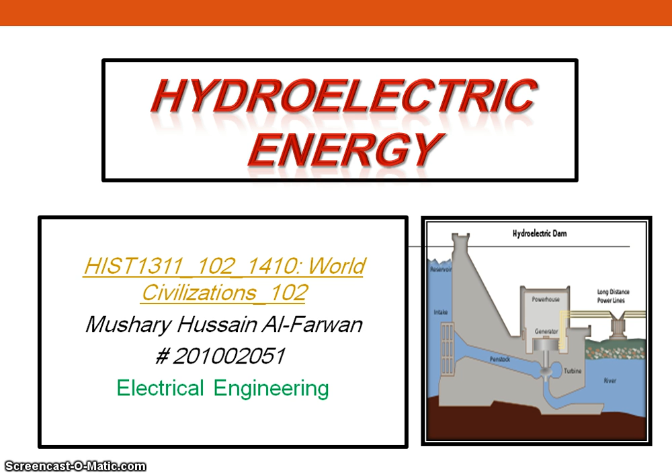Today I will talk about hydroelectric power, or hydroelectric energy. This kind of energy is very important in our future because it has many benefits, more than other kinds of energy.

My outline: I will talk about what hydroelectricity is, the history of hydroelectricity, methods to generate hydroelectricity, and I will give you some advantages of hydroelectricity. In the end, we will talk about world hydroelectric capacity.

What is hydroelectricity? Hydroelectricity is the term referring to electricity generated by hydropower, the production of electrical power through the use of the gravitational force of falling or flowing water, from up to down in this way. Hydroelectricity is the most widely used form of renewable energy.

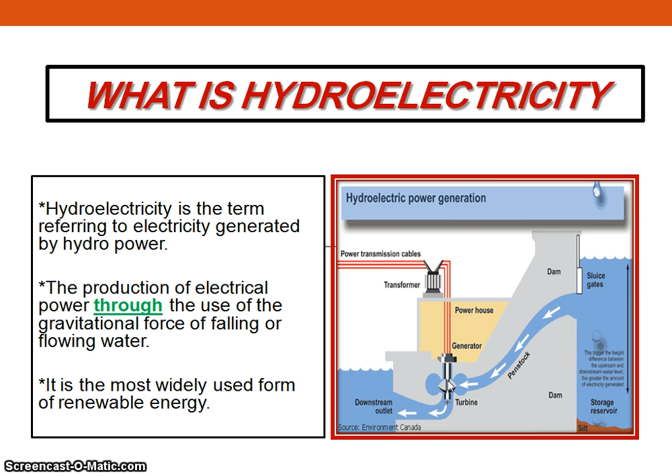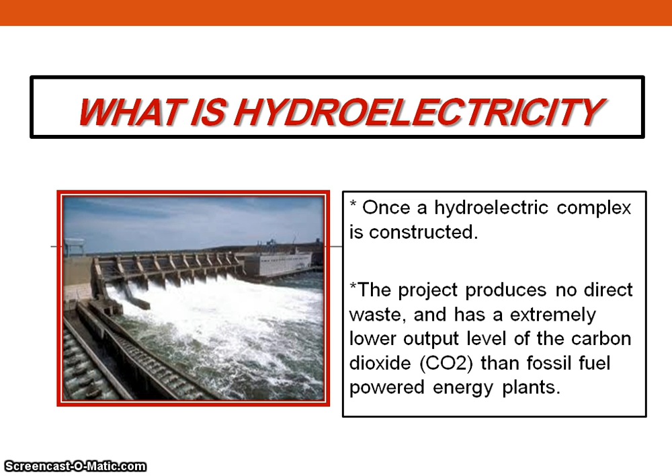Once a hydroelectric complex is constructed, the project produces no direct waste and has an extremely lower output level of carbon dioxide, CO2, than fossil fuel powered energy plants.

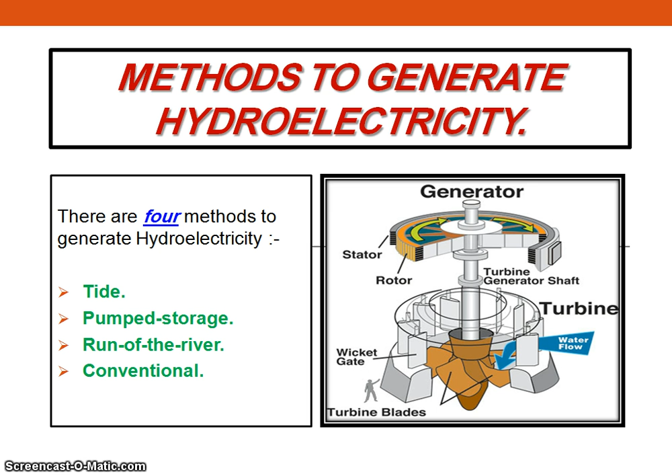Now we will talk about the methods to generate hydroelectricity. There are 4 methods to generate hydroelectricity. The first method is called the tide method. Second one, pumped storage method. Third one, run of the river method. The last one, conventional method. I will explain each of them in the next slide.

The tidal method: a tidal power plant makes use of the daily rise and fall of water due to tides. It can also be dispatched to generate power during high demand periods. Less common types of hydro schemes use water's kinetic energy or undammed sources such as undershot water wheels.

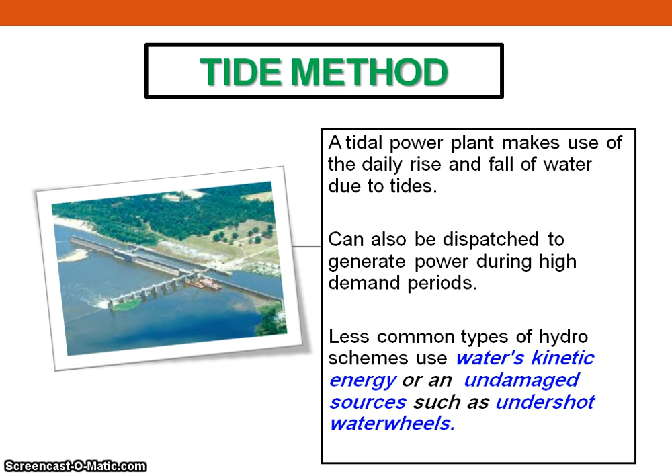Pumped storage method and run of the river method. These methods produce electricity to supply high peak demand by moving water between reservoirs or between tanks, which are here in this picture, this one and this, at different elevations at times of low electrical demand.

Pumped storage schemes currently provide the most commercially important means of large-scale grid energy storage and improve the daily capacity factor of the generation system.

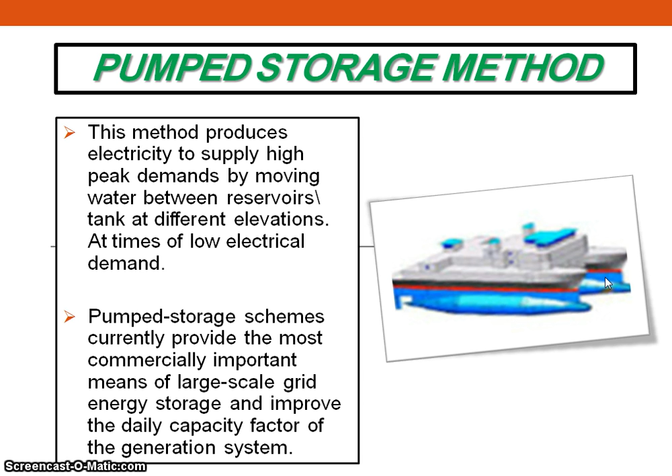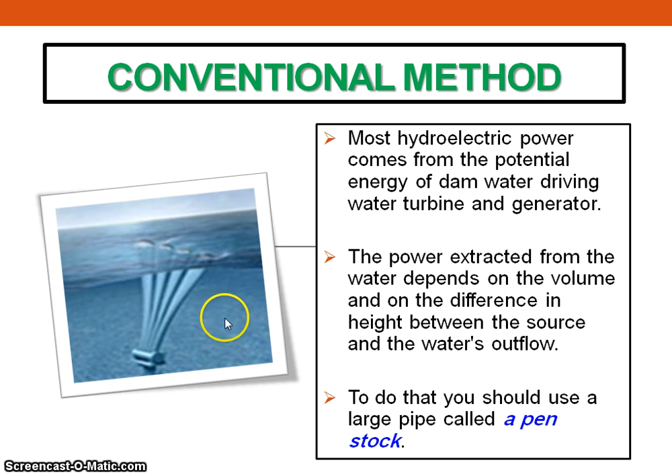Conventional method. Most hydroelectric power comes from the potential energy from a dam, driving a water turbine and generator. The power extracted from the water depends on the volume and on the difference in height between the source and the water's outflow. To do that, you should use a large pipe, which is called a penstock. As we can see here in this picture, this is the large pipe, which is called a penstock.

Here are the advantages of hydroelectricity. First, the major advantage of hydroelectricity is elimination of the cost of fuel. Second, since hydroelectric dams don't burn fossil fuels, they don't directly produce carbon dioxide. The third advantage is a hydroelectric plant may be added with relatively low construction cost.

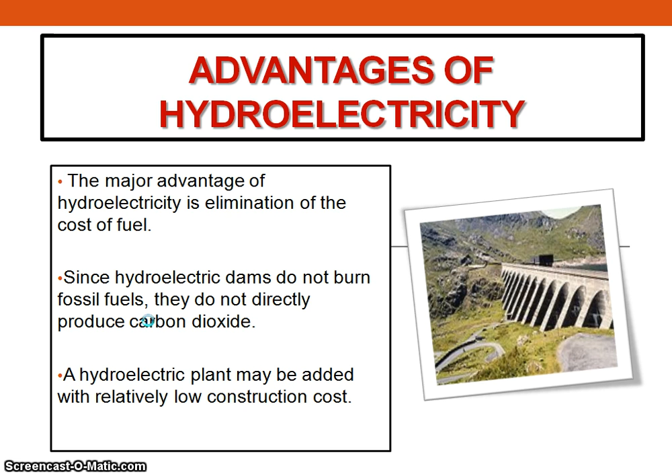Now we will talk about the world hydroelectric capacity. World renewable energy share as of 2008, with hydroelectricity more than 50% of all renewable energy sources. World renewable energy potential.

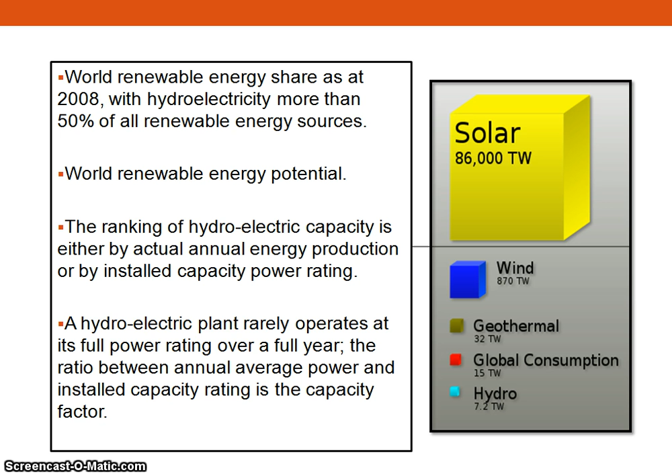The ranking of hydroelectric capacity is either by actual annual energy production or by installed capacity power rating. A hydroelectric plant rarely operates at its full power rating over a full year. The ratio between annual average power and installed capacity rating is the capacity factor.

Here are 10 of the largest hydroelectric producers in 2009. We chose 10 countries: China, Canada, Brazil, United States, Russia, Norway, India, Venezuela, Japan, and Sweden. This side gives us the value of annual hydroelectric production, and this side gives us the value of installed capacity. Also, this side gives us the capacity factor, and the last one gives us the percentage of total capacity.

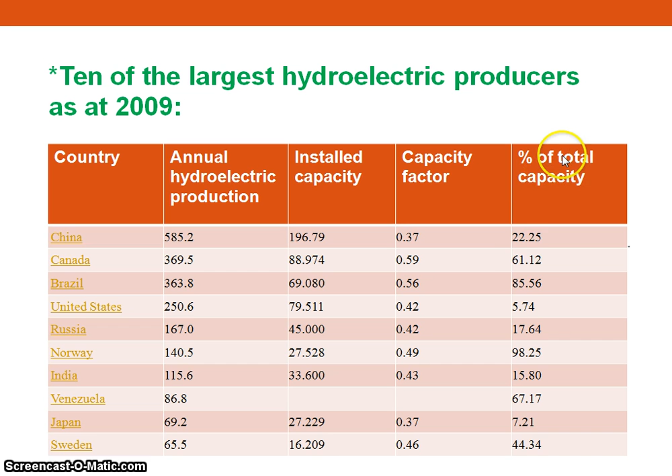Here is a short video about hydroelectricity. Let's start to see this video.

170,000 cubic meters of water flow past here every minute at almost 60 kilometers per hour. That's enough water to fill about 100,000 Olympic swimming pools every day. Standing here, you can actually feel the power of the water. Harnessing that power is what hydroelectric stations have been designed to do for over 100 years in Ontario. In essence, they are factories that convert the energy of falling water into the flow of electrons, or what is commonly called electricity, the electricity that powers the province.

Most hydroelectric stations use either water diverted around the natural drop of the river, such as a waterfall or rapids, or a dam is built across a river to raise the water level and provide a drop to create a driving force. Water at the higher level is collected in the forebay. It flows through the plant intake into a pipe called a penstock, which carries it down to a turbine water wheel at the lower water level. The water pressure increases as it flows down the penstock. It is this pressure and flow that drives the turbine that is connected to the generator.

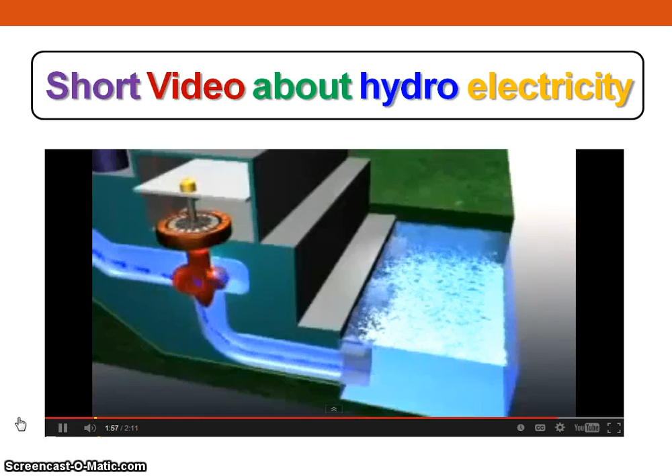Inside the generator is the rotor that is spun by the turbine. Large electromagnets are attached to the rotor located within coils of copper wire called the stator. As the generator rotor spins the magnets, a flow of electrons is created in the coils of the stator. This produces electricity that can be stepped up in voltage through the station transformers and sent across transmission lines. The falling water, having served its purpose, exits the generating station to the tailrace, where it rejoins the main stream of the river to continue the cycle of creating clean, renewable energy for Ontario.

In the end, this energy is very important to us in our future. It's really useful energy, and also it is not expensive, and we must use this kind of energy in our future, and work to develop this energy in our field and life.